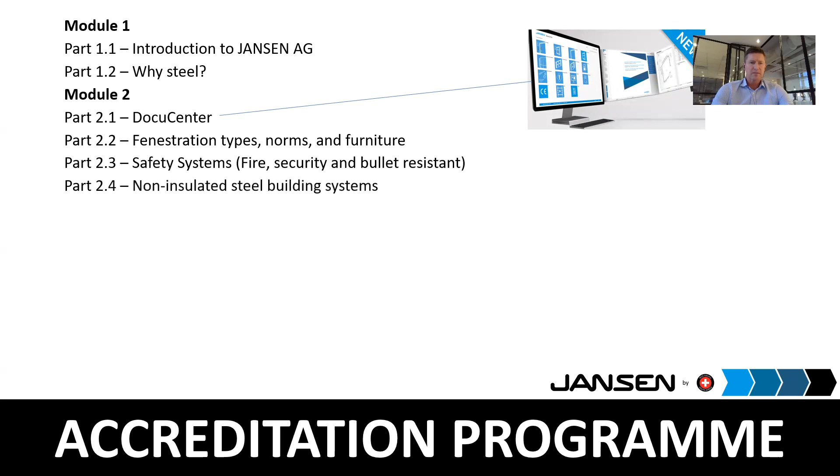So the last of the modules, you've gone through the introduction, the benefits of steel. You've had a look at the DocuCenter, fenestration types, norms and furniture, safety systems, and then the various types of insulated and non-insulated building systems. You've done training with Luke and on JANIsoft, and then you've gone with Andreas into the factory to do fabrication, finishing and glazing, and 4.2 is what we're looking at today, surface protection and logistics.

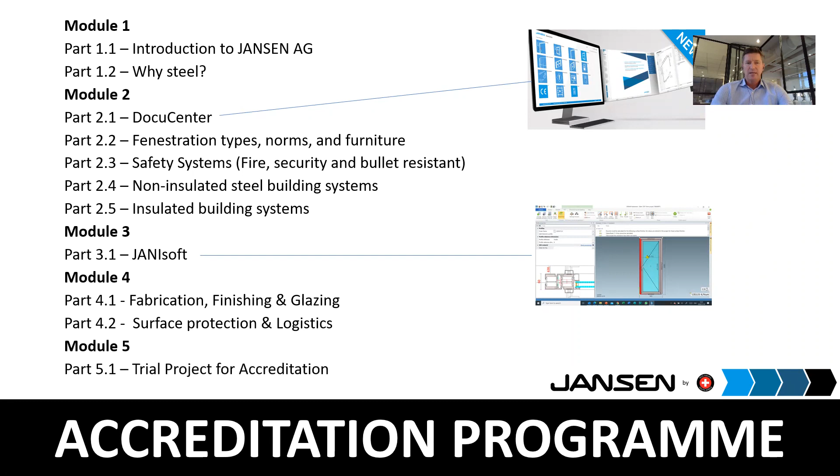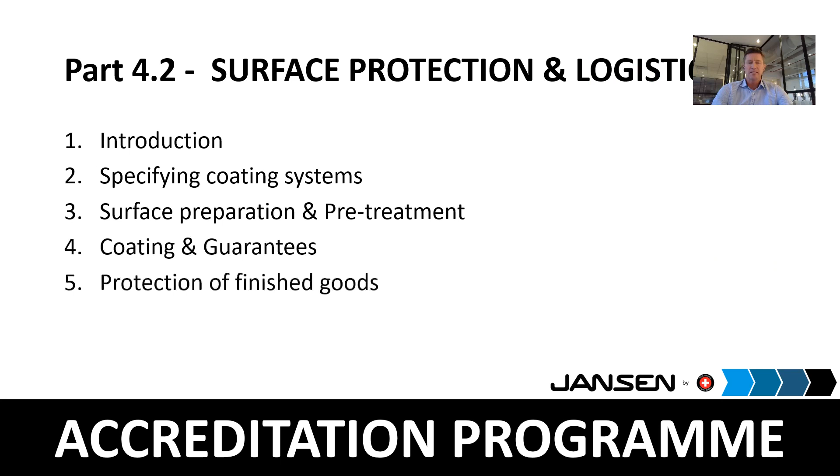And the last module is the project we mentioned at the beginning for accreditation. So for those of you that have not yet done surface protection and logistics, welcome to the last of the accreditation modules. What we're going to go through is the introduction and then specifying coating systems. Then we're going to look at surface preparation and pre-treatment, coating and guarantees, and then the logistics of protection of finished goods, as the contractor doesn't take responsibility for that.

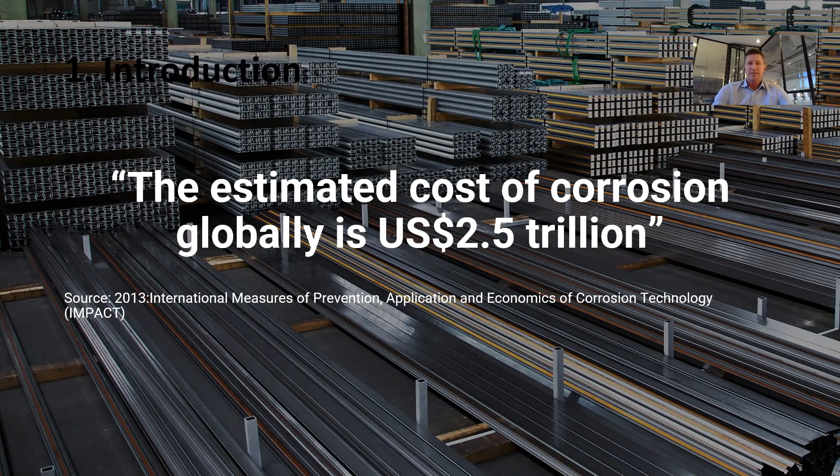Now, we all want to do this kind of work, whether residential or commercial. In order to do that, we need a good understanding of corrosion protection. The question is why? The estimated cost of corrosion globally is 2.5 trillion US dollars. That is a very significant number. So we need to understand what we're doing when it comes to corrosion protection of steel, especially you that are going to become JANSEN ambassadors here in South Africa.

Firstly, the JANSEN coating guideline document, available from DocuCenter, has everything that you need to know, apart from the final decisions on what area you're working in, what corrosivity category that area is rated as, and obviously the guarantees that you and your applicator are agreeing on in terms of what is the best solution for the project. So that's the guideline document, and you can find everything in there, from the terminology, the specification of coating systems, and how to prepare the surface, pre-treatment, coating, quality control, and also a list of standards and normative references, which are typically European.

Now, as ambassador of JANSEN Systems, corrosion is critical in terms of protection, and corrosion can damage the JANSEN reputation. As we roll out in South Africa, it would be a real issue if we found corrosion on the new projects. And if we find an offender, a fabricator who continues to complete projects that are subject to corrosion, then that repeated offense might mean we remove your certification.

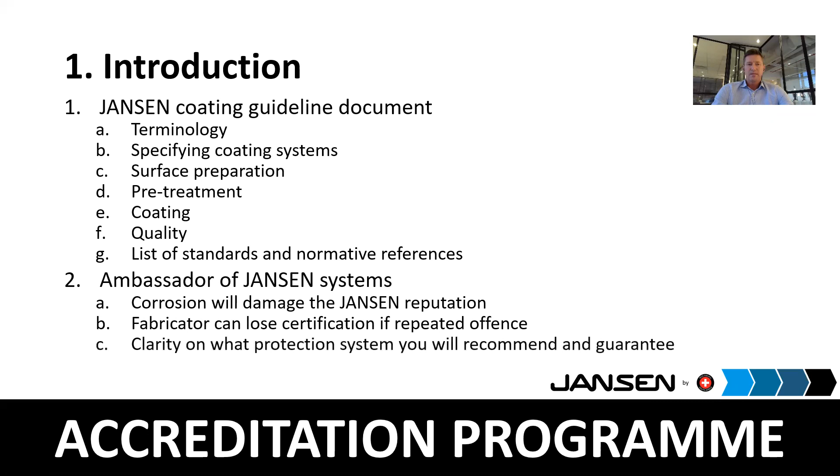Now, the first thing is we need clarity on what protection system you will recommend and you will guarantee. This is your decision, it's not ours. We're going to give some guidelines in this module.

And this is a very recent map, taken from Janse van Rensburg in 2010. It's been recently revised in a paper written in 2019. It goes through the corrosivity across South Africa. Now you'll see on the far right of the table here, you've got types of corrosion, mild steel corrosion rates in micrometers per year, and then galvanized steel sheet life in years.

And if you go down to the bottom, you'll see the intertidal to 5 kilometer inland, severe marine corrosion, the type of corrosion. And you'll see the corrosion factor is from 100 to 300 microns per year, which is a hell of a lot. You can take your time to look through that in the recording.

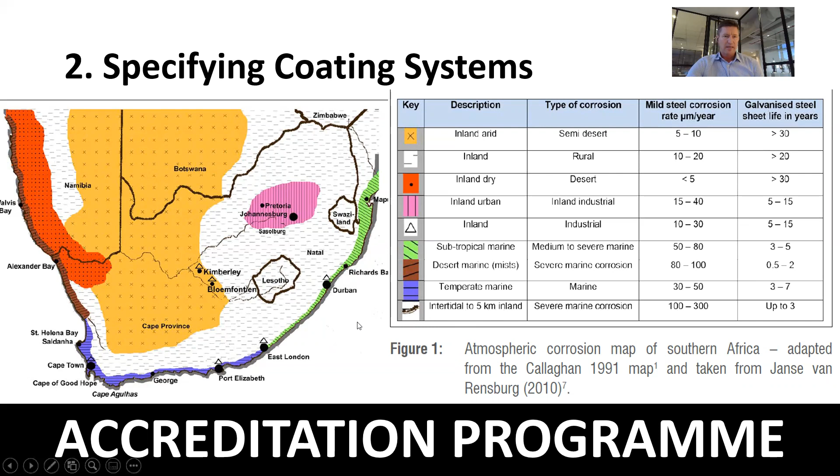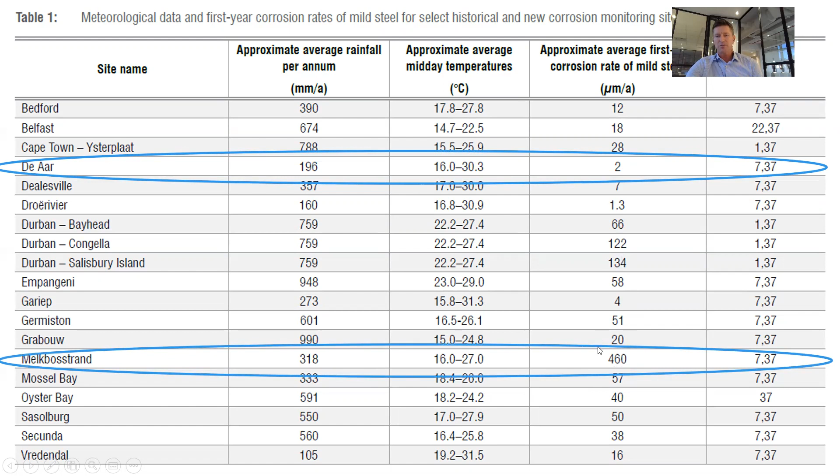Here's an example of an actual site that was recorded in the study. You'll see Melkbosstrand down here in the Western Cape recorded nearly 0.5 millimeter of corrosion on the West Coast in 1 year. In De Aar, on the other hand, recorded only 2 microns per annum. And here we see Melkbosstrand nearly 0.5 millimeter, 460 microns per year.

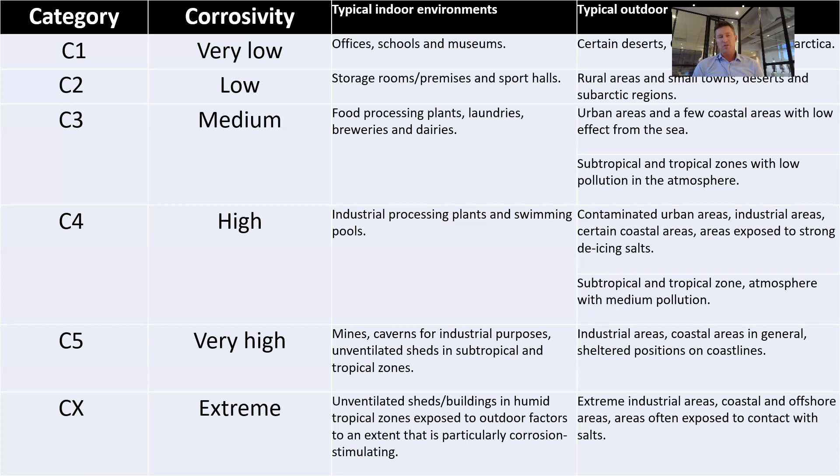Now, the corrosivity categories are C1 to CX. You're probably familiar with them. C1 is a very low category for offices, schools, and museums, and that can be deserts and so on. And then those closer to the coast, C5, which are very high corrosivity environments, can be mines for industrial purposes, unventilated sheds, and subtropical and tropical zones. And if you look here on the right, you'll see industrial areas, coastal areas in general, and sheltered positions on coastlines. So you need to speak to the engineer on your project or take a view with your applicator as to what category your project is in.

Now, just a couple of notes on this. Based on assimilated historical, published and unpublished, and new atmospheric corrosion data for South Africa, the atmosphere within the first 150 meters from the ocean is classified as extreme, CX, corrosive. So that gives you some clarity on that.

Between 150 meters and the 1 kilometer mark, the environment is rated mid C4, which is high, to mid C5, very high corrosive. From 1 kilometer to 30 kilometers, it's moderate, a C3 to high C4 corrosive. And for most inland locations, a low C2 to potentially high C4 corrosive.

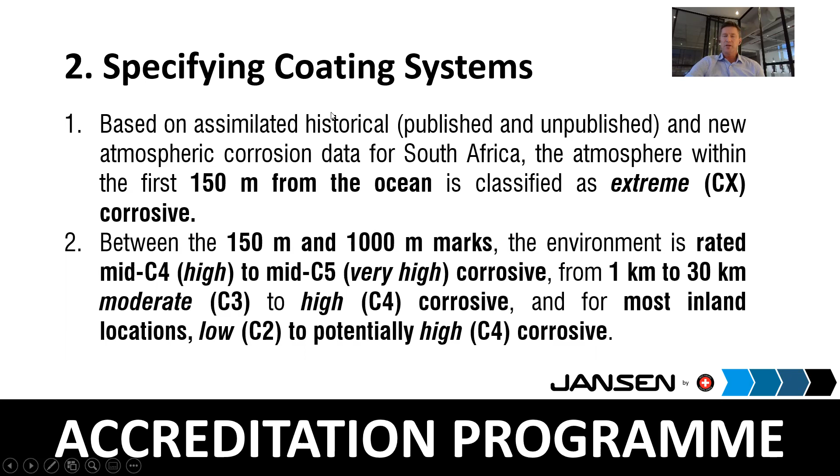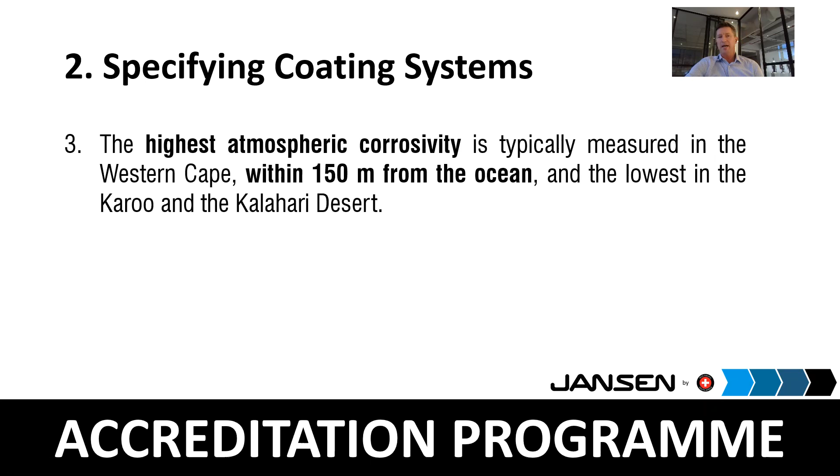So again, it's important for you and your fabricator to know what category your project is located in. The highest atmospheric corrosivity is typically measured in the Western Cape within 150 meters from the ocean, and the lowest in the Karoo and the Kalahari Desert.

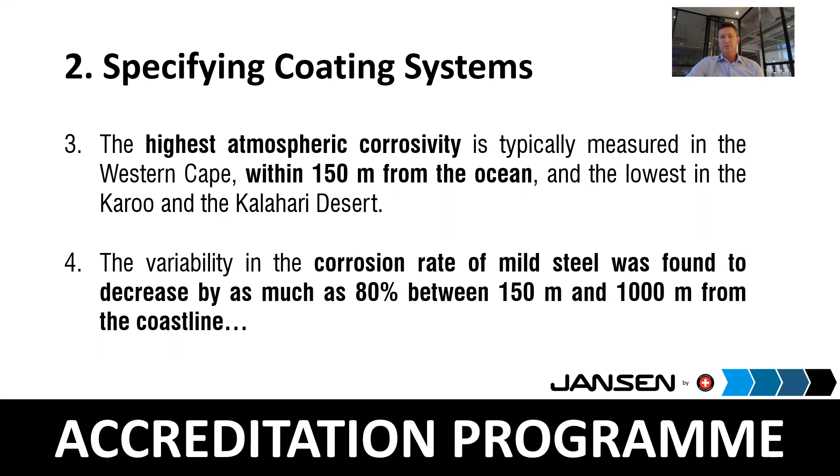Lastly, the variability in the corrosion rate of mild steel was found to decrease by as much as 80% between 150 and 1,000 meters from the coastline. That's very significant - a kilometer in from the coastline, there's a reduction of as much as 80% in terms of corrosivity. All right, let's look at number 3, surface preparation and pre-treatment.

Cutting with a cold cut blade, a carbide tipped blade, for small cutoff and CNC centers makes a big difference to the quality of your work. It allows your cuts to be neat, with very few sparks and very few burrs, and improves the butt jointing of your joints.

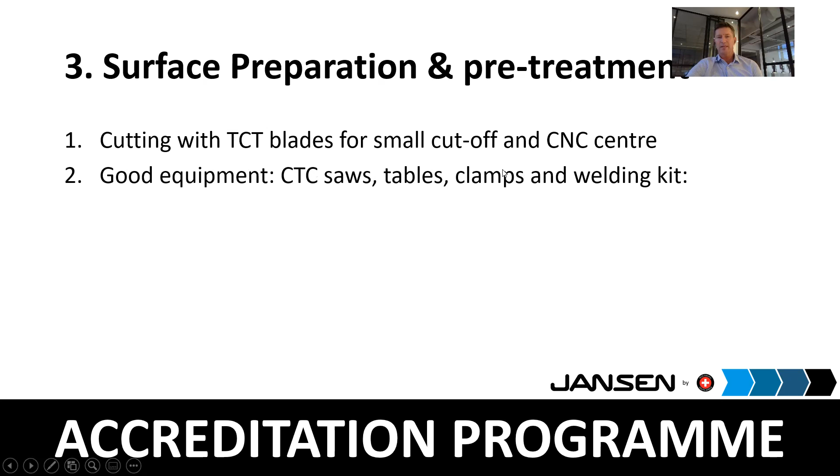Good equipment like saws, tables, clamps, and welding kit make a significant difference in the ultimate quality of your work and hence the surface of your product. Ideally, the welding machine should be either MIG or TIG, as arc welders - either the transformer or the inverters - they do work, but just take more effort to clean off.

And then obviously grinding with the correct sanding disc grades. In your training, you've seen that Jansen suggests the 3M sanding discs, which work well, and to get a finished surface, the eccentric grinders or centric sanders.

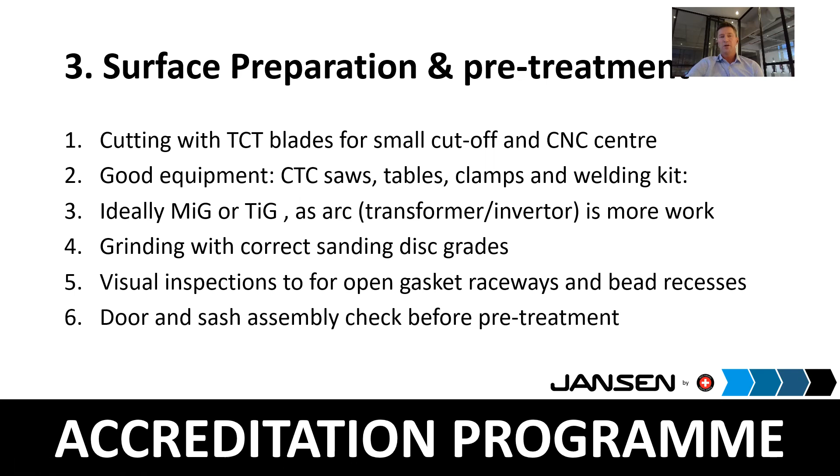A key thing before coating your product is to do a visual inspection to check open gasket raceways and bead recesses to make sure you don't have any weld spatter closing those gasket raceways. Then check that the door and the sash assembly are working before you go for pre-treatment and coating.

So let's look at that preparation and pre-treatment. Now we spoke about the carbide tip blade for cold cutting - you can see there it's not a carborundum blade, and they are certainly more effective and they last longer.

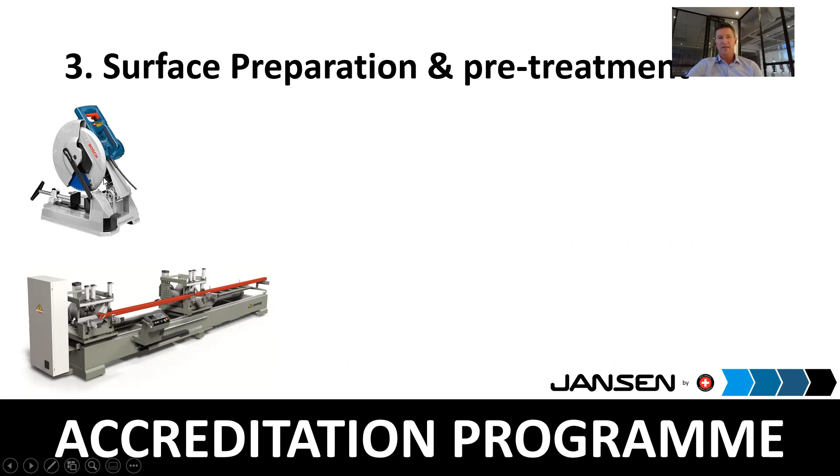The tables, to get flat work and ensure that your surface of your joints are flush, you need decent trestles, and those trestles can be simple trestles on trolleys or more complex ones like the Jansen, that you can invert the workpiece and be able to do welding without unclamping any of the work.

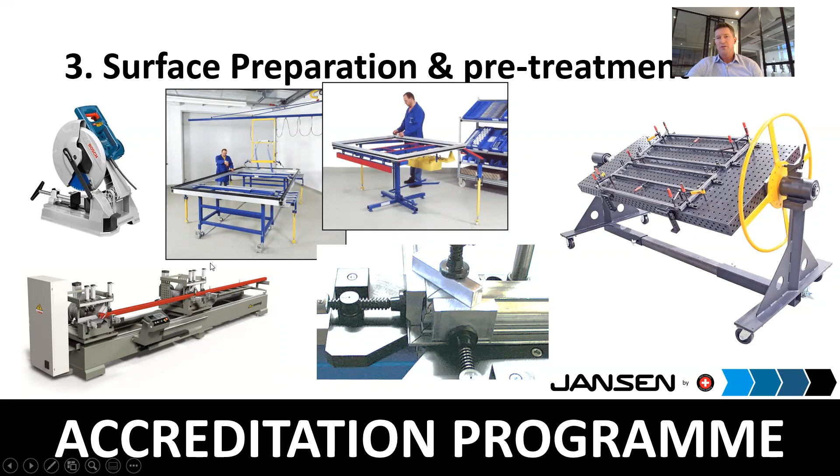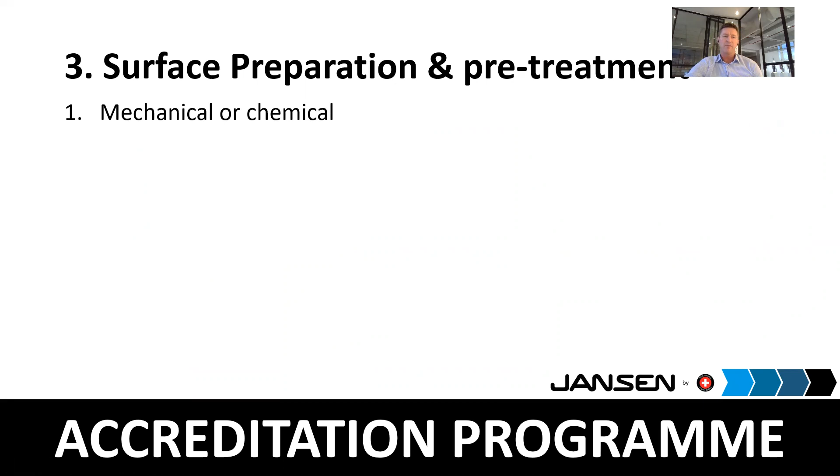The pre-treatment can be mechanical or chemical. Those of you that have your own powder coating plant, some of you may only have chemical treatment tanks, and some of you may have mechanical for things like sand or shot blasting. The pre-treatment is divided into 3 basic categories.

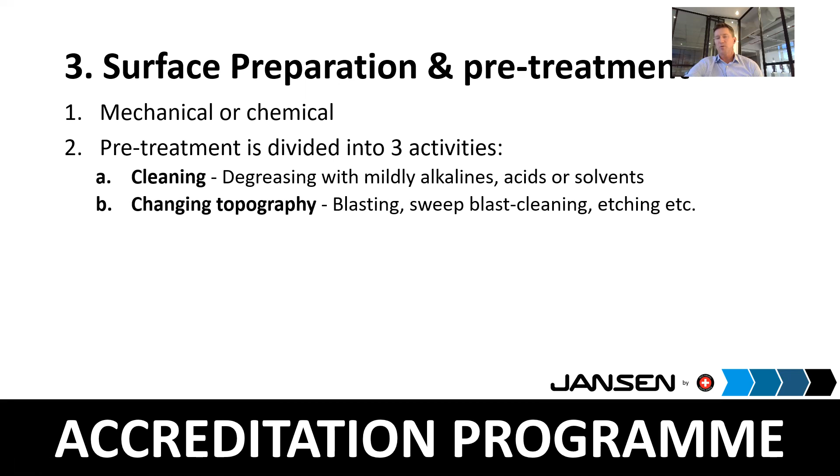First, the cleaning side of it, the degreasing with mildly alkalines, acids, or solvents. Then the changing of the topography, which is blasting, sweep blast cleaning, or etching. You'll notice that you cannot shot blast this material as it changes the material surface too much. So sweep blast cleaning is more like a very fine grit, and I can't give you that grit offhand.

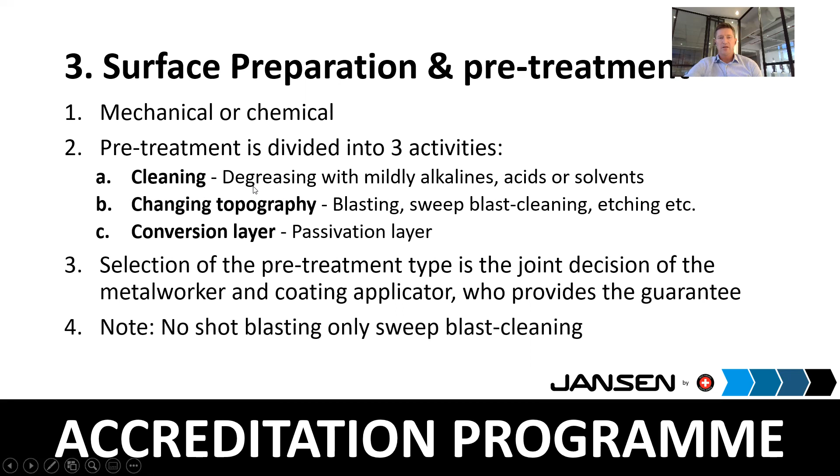The conversion layer is the third part of pre-treatment, and that's the passivation layer prior to treating. The selection of your pre-treatment type is a joint decision of yourself as the metal worker and your coating applicator, who will eventually provide the guarantee. As a note, no shot blasting, only sweep blast cleaning with a very fine grit.

Then the coating options and guarantees. The question you've been asking, what are we going to use? For the protection of outdoor elements, it will obviously depend again on the corrosion category that we mentioned.

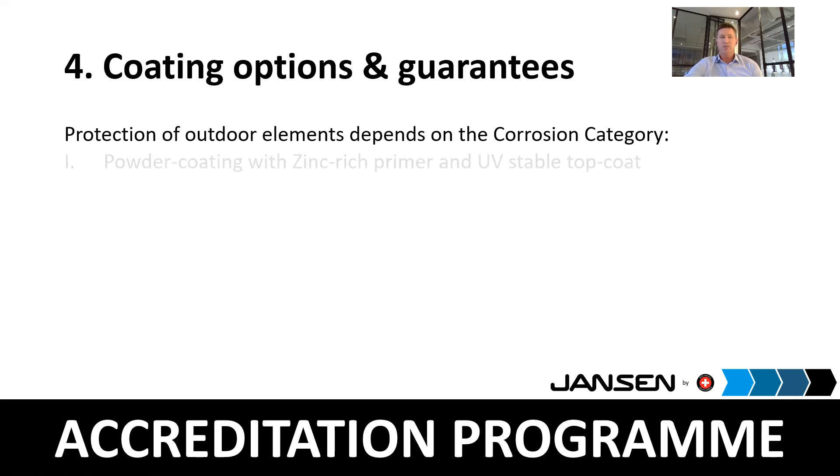One of the options, the first option, would be powder coating with both a zinc-rich primer and a UV-stable top coat. I think that's probably the simplest of the coating systems and possibly the most reliable in terms of your outcomes. Some powder coaters may not often use the zinc-rich primer, they might be using strontium primers, and in some environments that's fine.

The zinc-rich primer typically is a little bit more expensive than the strontium, but it gives you, certainly at the coast, the guarantees that you need. The accredited paint systems from either Sigma or Jotun or others - these accredited paint systems are typically two-part zinc-rich epoxy primers, and then they are UV-stable polyurethane two-part top coats.

So you can use paint systems, and the paint systems at least give you a reasonable architectural finish if done with a spray application. I've spoken to the guys who we'll speak to in a second who've done a lot of work with these paint systems.

The third option is zinc plating and then UV stable powder coated finish. Also with the zinc plating, something to note is that the zinc plating should not be passivated prior to the powder coating finish, I am told. Again, you'll need to check that with your applicator.

And then the fourth and last one is a thermal zinc spray and then a UV stable powder coated finish, or similar. Now the thermal zinc spray gives you a nice, kind of coarse-ish, not too coarse, like a suede kind of finish, and a very good surface for applying the powder.

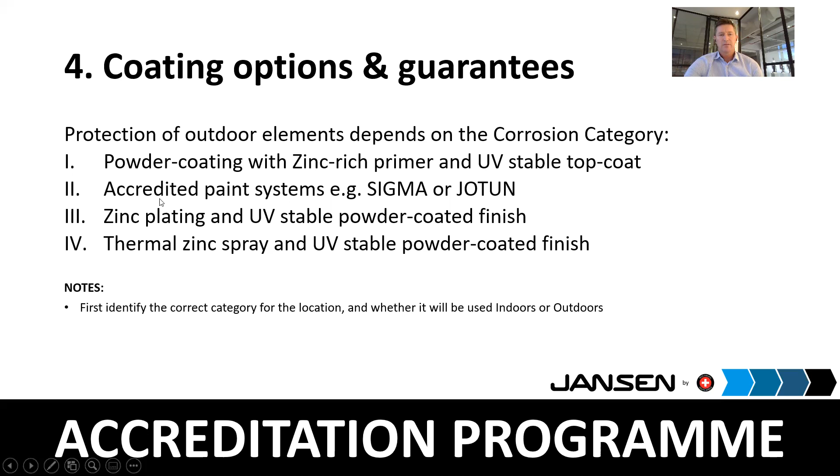Another important note is that hot dip galvanizing is not advised due to the warping, as you're all familiar with, or it will block the gasket raceways.

You know that most steel products in this country, you have to have self-adhesive gaskets, or you'd make some plan with the gaskets. But the Jansen systems have a gasket raceway that you press or roll the gasket into, and they can get blocked up with welding spatter, or in this case, with hot dip galvanizing. Obviously, the hot dip galvanizing also costs a lot of money to clean up, and there's a risk of compromising the integrity of the coating when grinding it down.

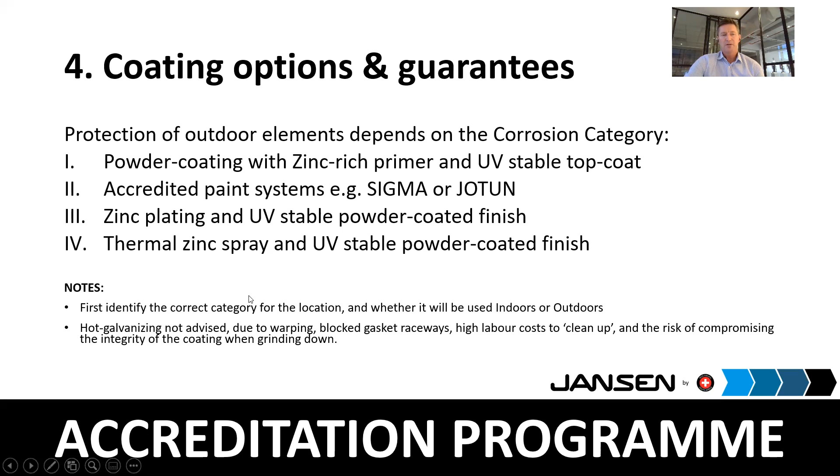I spoke to a chemical engineer from Technical Coating Solutions, and he actually issued a guarantee on a job in Saldanha on the west coast of South Africa. He noted that he was able to achieve a 20-year guarantee using Sigma coatings, obviously with some caveats that come in the maintenance regimes with those guarantees, but still that is very significant at the coast, achieving 20-year guarantees with the right industrial applications of paint systems.

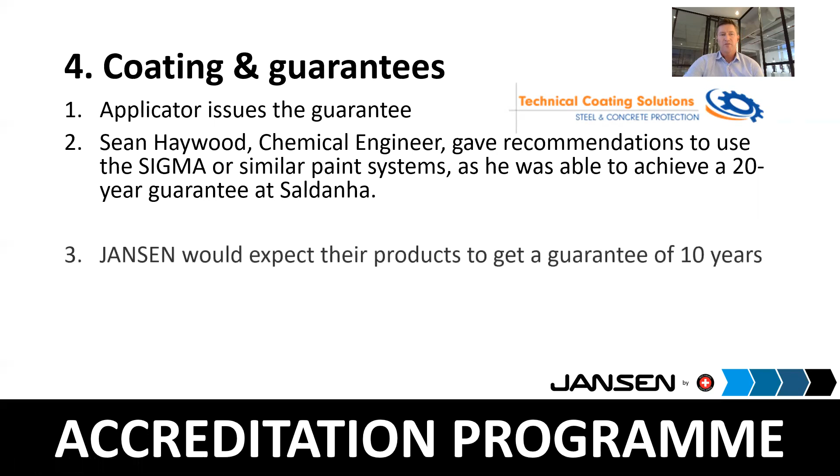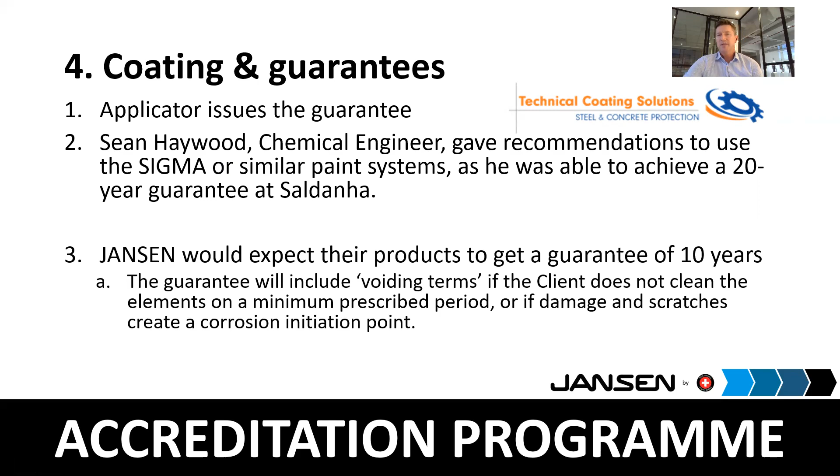Now, JANSEN would expect their products to get a guarantee for 10 years, and those guarantees will include voiding terms if the client does not clean the elements on a minimum prescribed period, or if damage and scratches create a corrosion initiation point. Okay, I hope that makes some sense to you.

The last item is that your goods are your responsibility throughout the whole construction process, and typically contractors don't take ownership of that, according to the normal JBCC document, until practical completion as defined in the JBCC contract.

Now, damage to goods can be caused in a factory due to incorrect storage and handling. And when you take time to think about these things, you can mitigate those risks.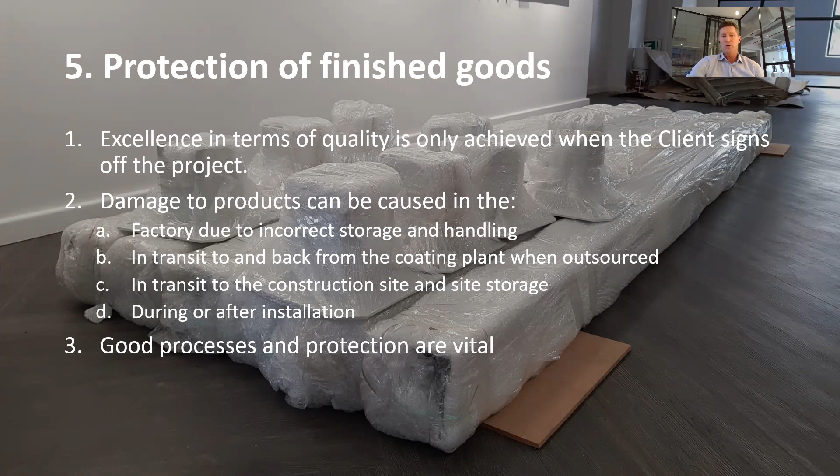And then in transit to the construction site and on site storage, you also know that your team's not ready sometimes on site. You deliver it to site, there's not a proper container, or maybe you don't have a container on that specific site, and damage occurs there by other guys moving the material or incorrect storage. And then, as we said earlier, during or after installation, while the works are being commissioned towards practical and final completion, good processes and protection are certainly vital to ensure good quality.